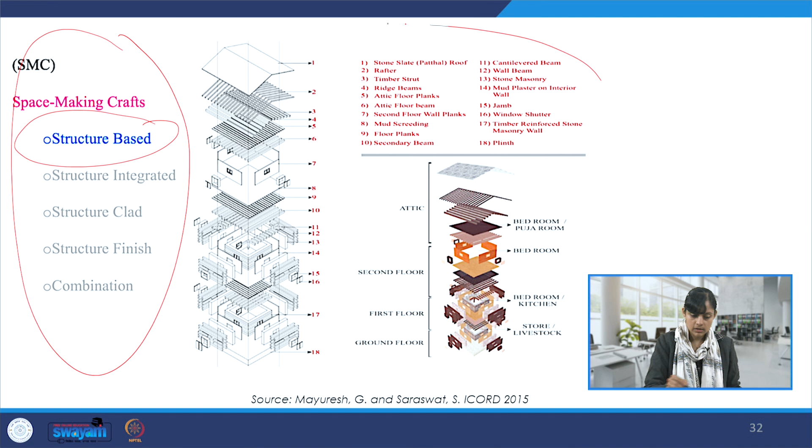So here I'm talking about space making crafts, and I'm highlighting the structure based space making crafts. This is an example of Koti Banal architecture from Uttarakhand.

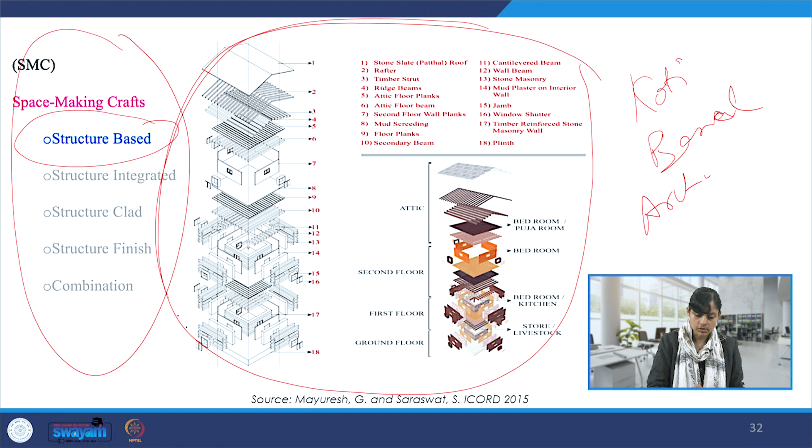And here we see the pure role of structure. This drawing, which is like an exploded 3D view, talks about all the space making elements from 1 here to 18, and it explains the entire assembly and the construction and how it is made. There are local materials, it's done by community and local makers. There is a skill set involved, there is a technique involved, and these are very, very earthquake resistant houses.

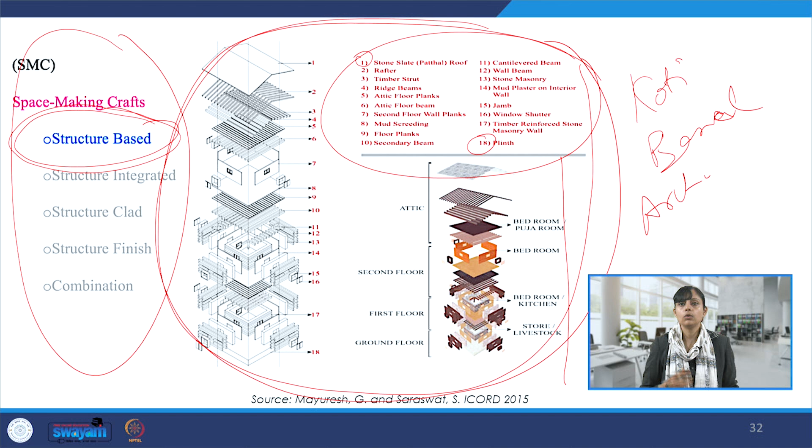And how this is made—so this is a building craft and it is structure based, as per the classification that I have derived based on a lot of background research and published matter, and also taking from the findings of my own PhD.

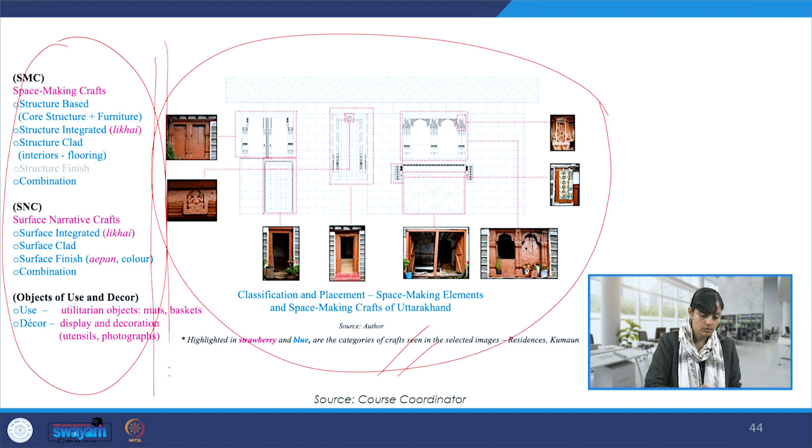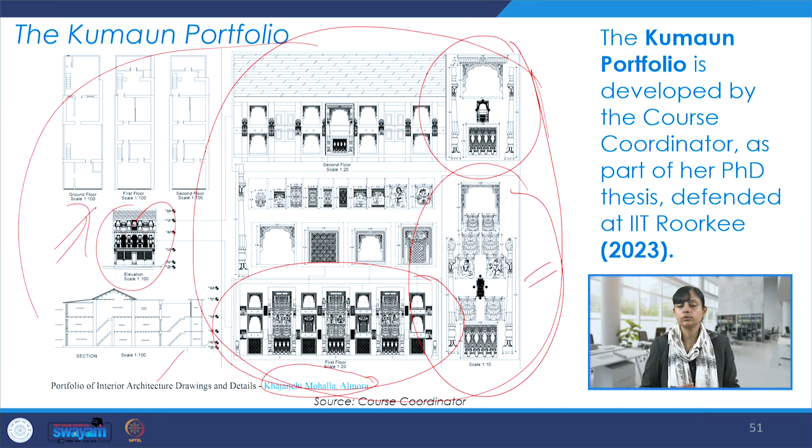And a lot of details—I don't want to show the whole thesis, but some chapters are already on Shodh Ganga if you would like to see more details about what I just mentioned.

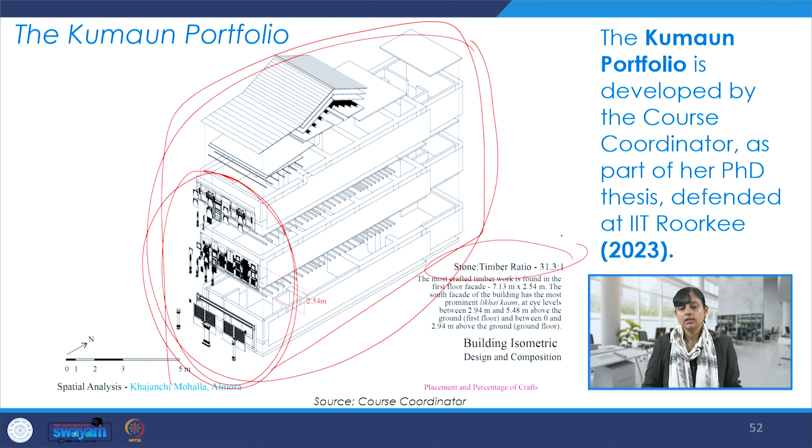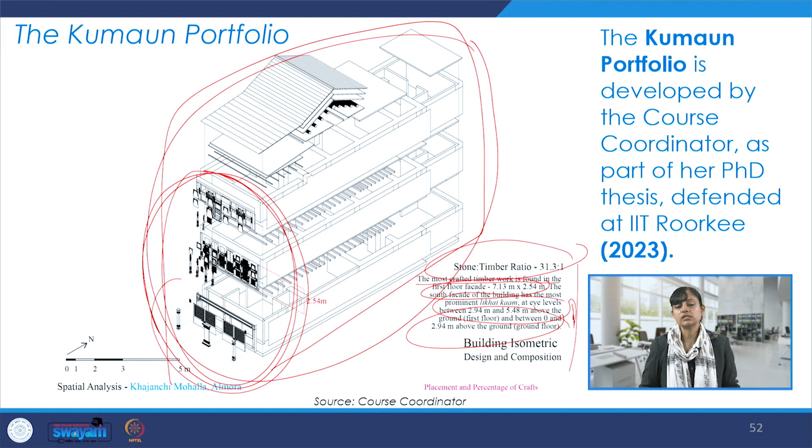So if we see over here, this is the facade shown on the previous slide, and this is the entire building. Even analyzing the stone-timber ratio, where the most crafted timber work is found, what the dimensions are, and where the likhai kaam or wood carving is most prominent at what eye levels. All of that, along with the design and composition, trying to understand materiality, eye levels, detailing, and what it does technically to a user and onlooker—all these details have been analyzed, and it was also broken into SME, SMC and SNC as per the system of classification, along with the examples we just saw.

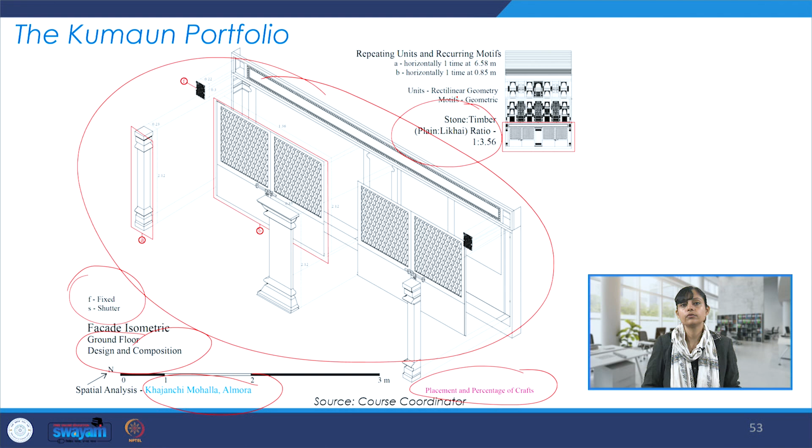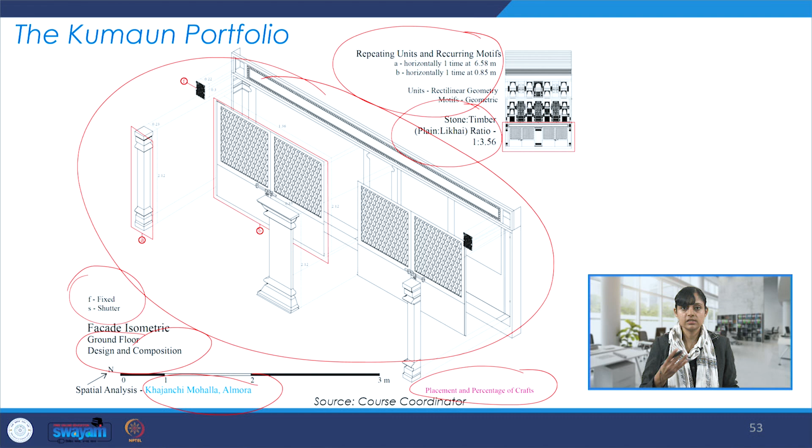So here again, we see the placement and percentage of crafts in the same building, ground floor—what are the fixed elements, what are movable elements, what is the ratio of craft versus plain surface, whether there are motifs or units that repeat or recur, whether they impart a rhythm, and what elements and principles of design are carried forward and showcased through our indigenous crafts, done by the community through their empirical knowledge and understanding of material and surroundings. That's a very detailed analysis.

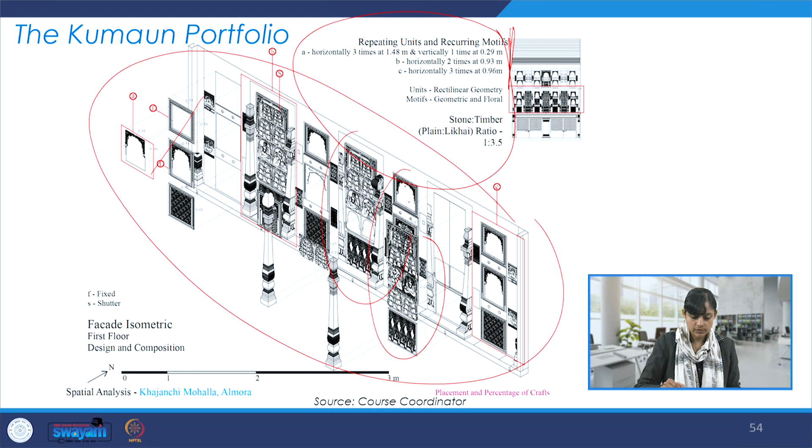Over here again we see the repeating units and recurring motifs and what they do to this facade—very intricate and beautiful details. This is an exploded view giving an understanding of these openings, decoded into further elements and components, and the composition, placement and percentage of crafts, ratio of stone and timber, and ratio of plain surface to likhai, which is wood carving.

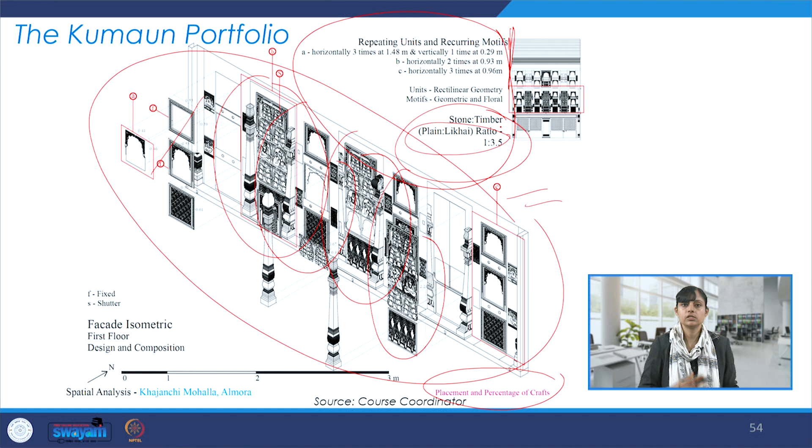I proudly called it the Kumaun portfolio because I was very inspired by the Jaipur portfolio. As a student of architecture and as a professional, I have been referring to it, and during this PhD I referenced it quite a lot. I liked the way material and making are highlighted through the Jaipur portfolio, and I tried to do that for the Kumaon region.

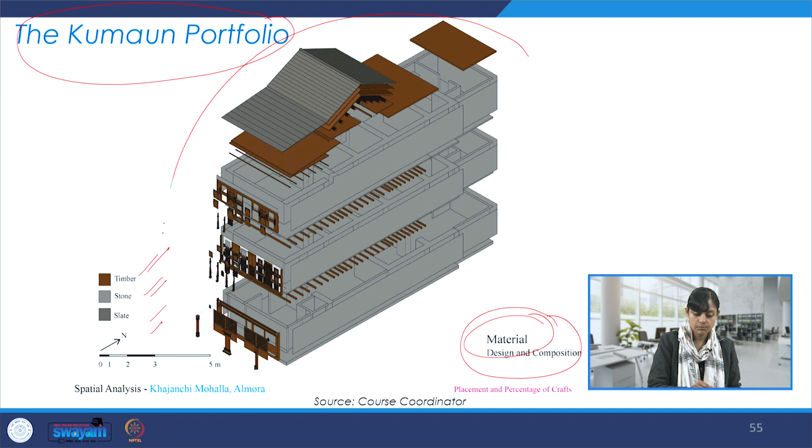So here we try to understand design and composition focusing on material—we see timber, stone, slate—and the percentage of each of these, and they are locally available, so there's nothing being transported from outside.

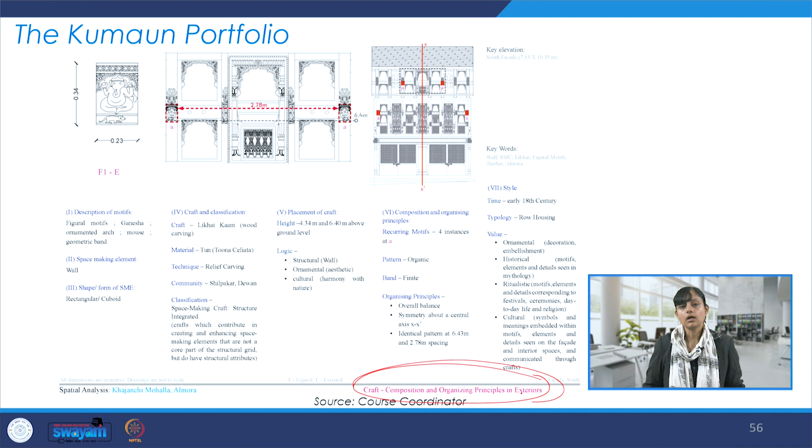Continuing again with this portfolio, I also tried to analyze, decode, and present craft in terms of composition and organizing principles seen in both exteriors and interiors.

Dimensions, placement at what distance, at what eye level, description of motifs, which particular element do we see, where these motifs are showcased, what are the shapes and forms or geometry associated with it, classification of craft.

The material in which it is achieved, the technique—here it is relief carving, and the material is a local timber known as tun—community that works on these crafts, so Dewan and Shilpakar, and SME, placement of craft, height above the ground level.

What is the structural logic, ornamental logic, cultural logic of having these motifs and this space-making element showcase these motifs in particular? Composition and organizing principles, recurring motifs, non-recurring motifs, pattern, organic, non-organic, finite band, infinite band, whether we see symmetry or any other principle, what is the organizing principle here?

Early 18th century is the time period, typology is row housing, and value in terms of heritage, culture, and what is the value matrix when we talk to the community. So this is the entire system where we try to understand the composition and organizing principles of these craft forms.

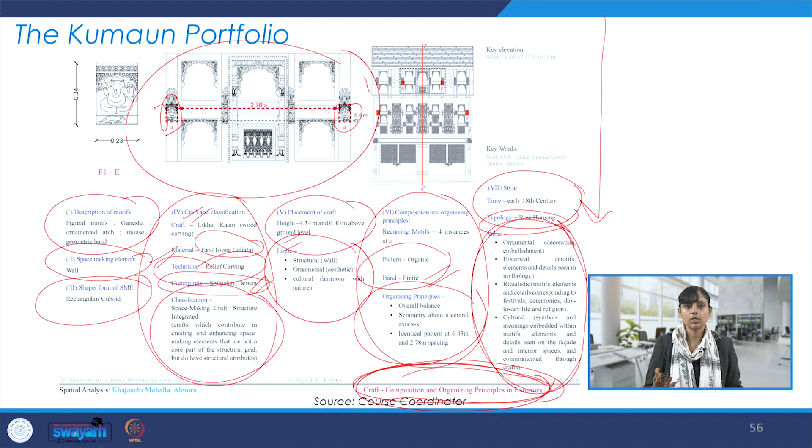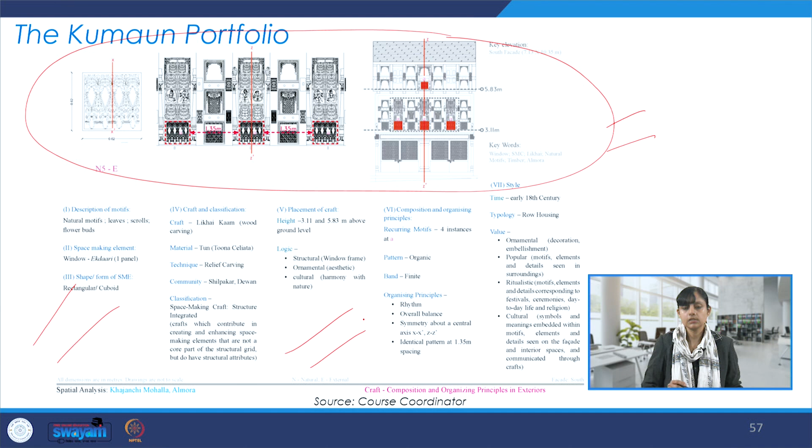More examples from that, the same house that we saw from Khajanchi Mohalla, Almora, and again the entire system, trying to understand the composition and organizing principles. More examples of that.

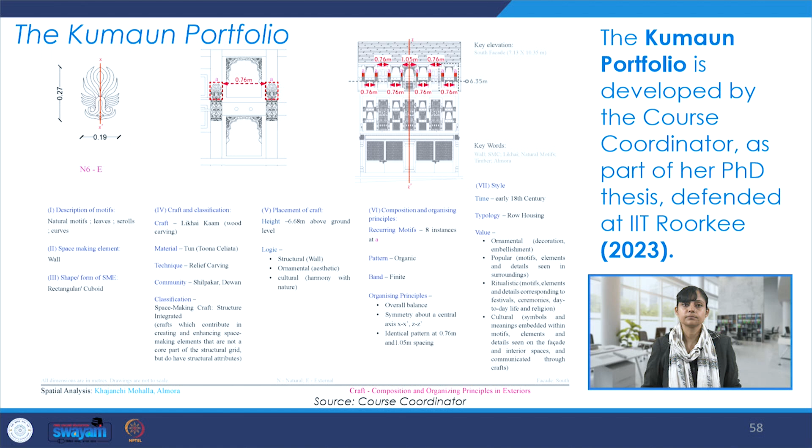So there is a profound science, technique, and knowledge behind these craft forms, and they have a very, very crucial role in space making. And it's a pity that we always see them only in terms of decor and just ornamentation, but which is also important—there is more to what they offer.

Again, continuing with the Kumaun portfolio, this is one more example, and here also the composition and organizing principles. So here we see Aipan, Likhai, all those crafts and different kinds of spaces.

Again, what is below eye level, at eye level, above eye level, different kinds of details, what material, what kind of craft, which community does it, how old are these houses, and they are still existing—what makes them exist till date. All of those details are there in the thesis if you are interested to know more.